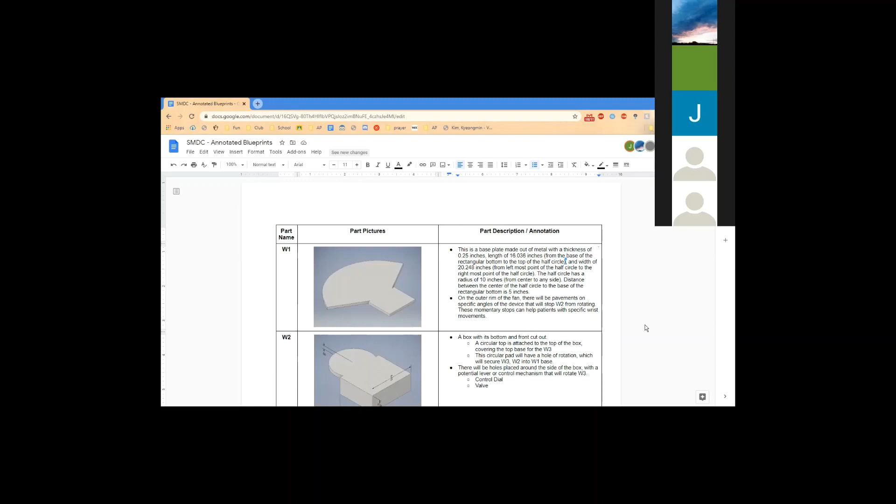Did you have any questions? Okay, I have a question. It says on the second bullet point there will be a pavement on specific angles of the device that will stop wrist 2. Do you mean like wrist 3 or something? Yeah, that should probably be wrist 2 is the cover, isn't it?

Yeah, and let's actually change the specific angles to pavements in 30 degree increments. Yeah, let's go 30 degrees increments of the device that will stop wrist 3 from rotating. Good. These momentary stops can help patients with specific wrist movements.

Is there anything else we might want to add that might describe how this piece functions, how it moves, or how it works? Any mechanical descriptions? Okay, write about like... yeah, write it down. If you guys are on the document, please feel free to make changes as we go. It's just kind of like a rough brainstorming to dwindle down on our annotated blueprints.

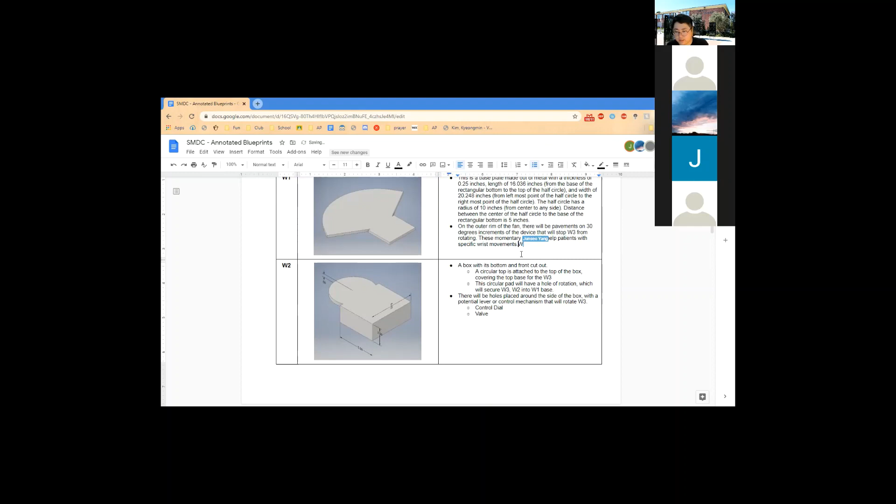Okay, while you're writing that, let me, oops, sorry. Alright, let me just write down something here. There we go. So, Junso, while you work on that bullet point, let's go over something else real quickly too.

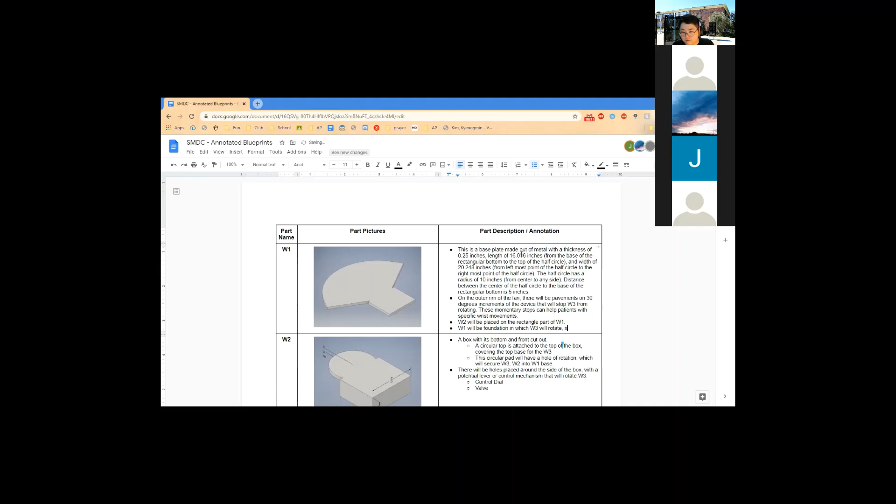First one will be the center, or the base plate - actually we already wrote base plate, so let's think of something else. Wrist 1 will be the foundation in which wrist 3 will rotate, covering the entire movement of wrist 3 as well as serve as the bottom plate for any gearboxes and internal work. Alright, you have one shot.

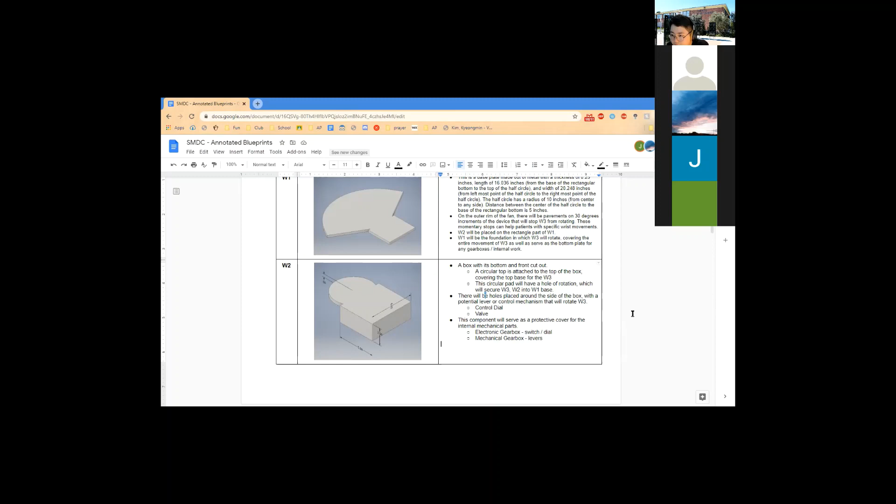Now, is this it for wrist 2, or do we want to add more? Everyone all good? I think this is it.

Alrighty, wrist 3. Ooh, this one's good. There's a lot here, who wrote this one? I guess someone who wrote it is not in the meeting. Okay, it's Magic Jane. Oh, Magic.

So this piece has both a cylindrical and prism shape to it. The cylindrical part has a diameter of 6 inches. Good, that's what I specified. Radius of 3 inches, okay good. And height of 2 inches.

Perfect. For the rectangular part, it has a width of 4 inches, right? And a length of about 7 inches. And the height of the rectangular part is 2.5 inches.

So I hope you guys know why this one's 2 inches and this one's 2.5 inches. It's because there's a little pavement on the top that separates the bottom part from the top part.

This part also has cylindrical holes placed 1.5 inches away from the very end of the width. Let's try to word that a little better. There we go. The hole has a diameter of 0.3 inches. Good, and the holes are indented 0.5 inches deep.

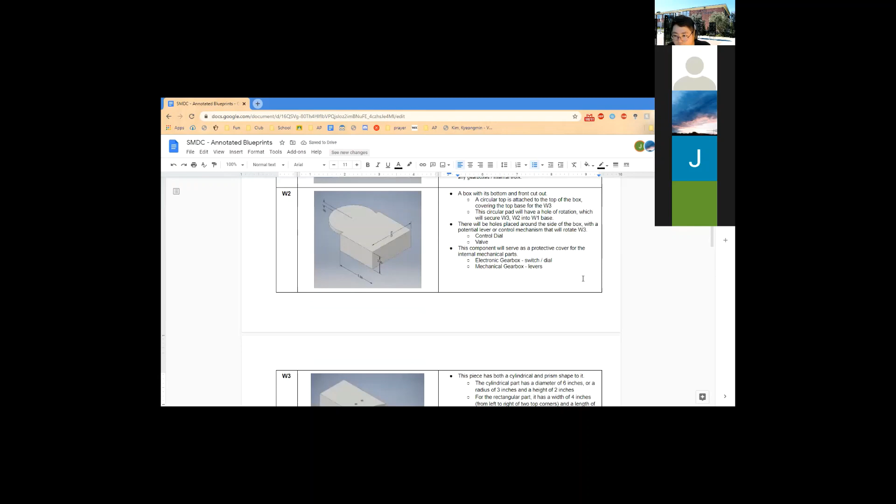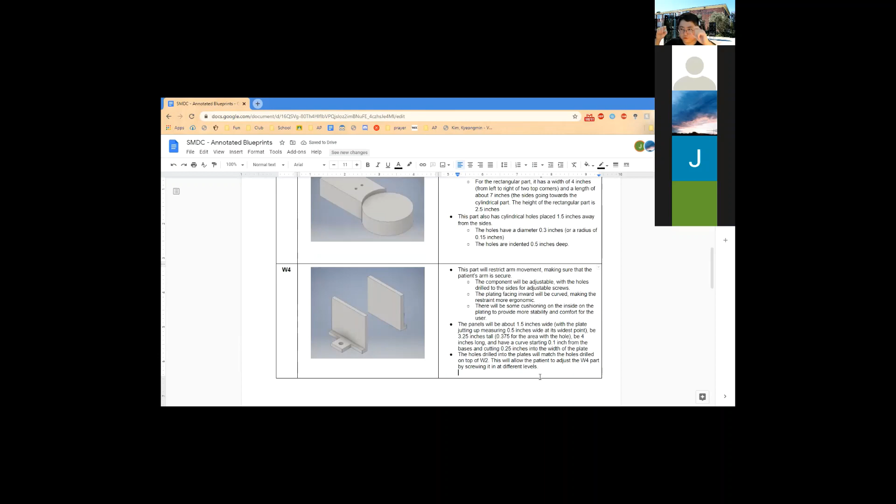This will allow the patient to adjust their arm, or adjust the wrist 4 part, by screwing it in at different levels. So do you guys know what I mean by that? Having multiple screws so I could clamp down at different levels.

So if you guys see, here, like a ruler, I have one right now. You know how there's holes inside it? Let me see if I can get it to focus. You see how there's holes in here? If we drill multiple holes at different levels, we can clamp it down at one place, or at this level. Then we can take it off, screw it back in, and clamp it at that level. But we can also clamp it down at really short levels. Everyone understand that concept of what we're doing?

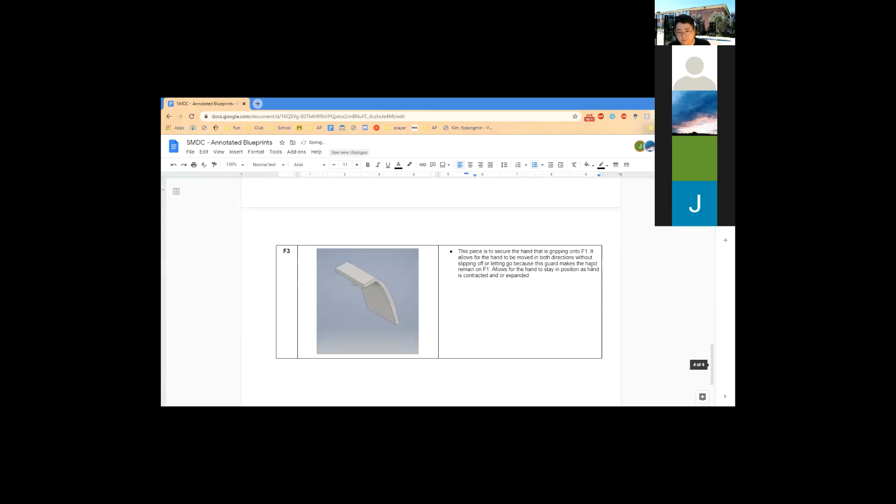And in a point after that, let's get into a little more detail, because when we just say it's a wrist protection guard, they might be like, what's a wrist protection guard? So let's quickly write that patients gripping onto F1 may slip without F3. The patient's hand will fall through the crevice between F3 and wrist 3, meaning that if we don't have this as a balanced ground, it's going to fall through the crack.

I can't exactly show you a model, actually let me try to do that real quick. While Jinso and Jake are working on those, let me pull up the assembly so I can show it to you guys a little more clearly, so that people watching this recording can easily know what's going on.

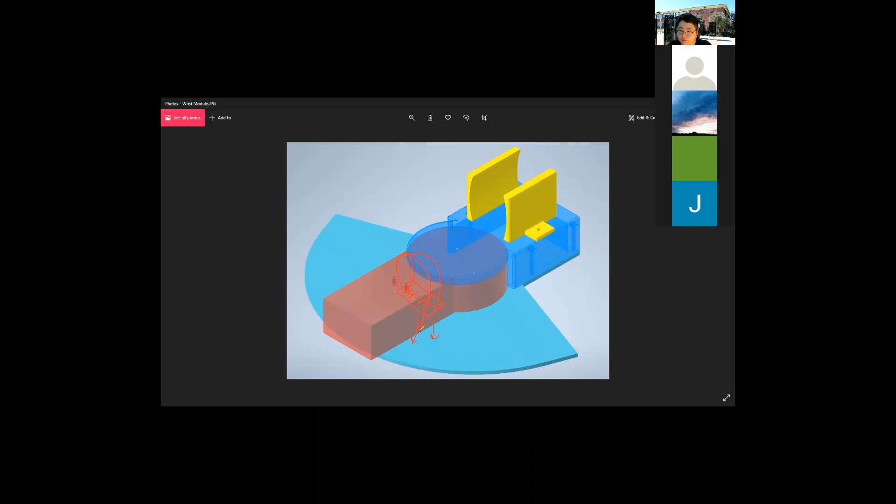That's basically what we're trying to prevent, because if we have something over here that catches the hand from falling, the hand doesn't have to fall this way. We could have something over here, and then a guard that goes down like that. So that's the gist of it. If this part wasn't here, the fingers or the hand might fall down that way, and that's what we're trying to prevent. That's what I mean by wrist guard or hand guard protection, so that there's something grabbing onto the hand that prevents it from just falling off. I hope that clarification helped you guys with the understanding.

Yeah, so perfect, let's add in just one more thing. I'm just talking about the outer ridge. The outer ridge of F2 will ensure that it keeps a uniform shape with F3, meaning there is no space remaining or blunt obtrusions. What I'm trying to say is we don't want excess material poking out.

So let me just quickly annotate over here on the surface. If this is how our F2 looks in the picture, that means our guard, which is F3, is going to have a base that looks like this, kind of an oval shape, so it can fit nicely right here. If the guard shape was rectangular, you'd also want F2 to be rectangular so it matches. That's what I'm just trying to say.

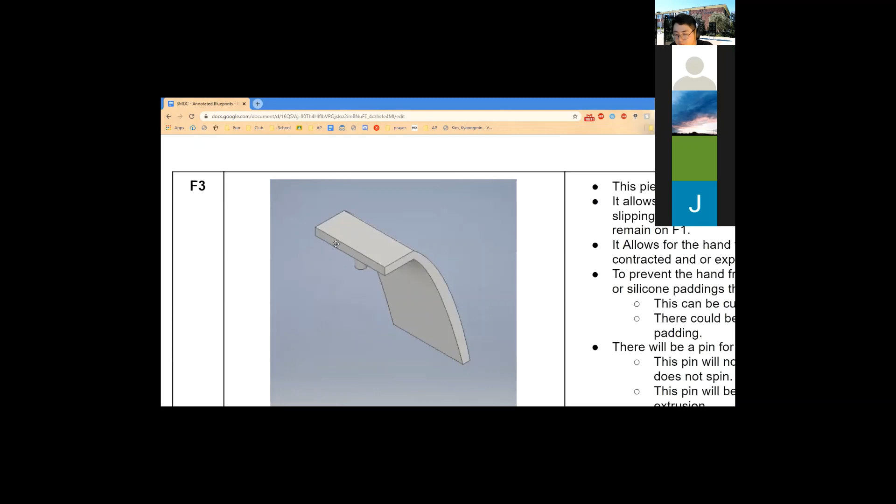Because here's the thing, a lot of what we're writing probably isn't enough to help our mentors help us with the actual manufacturing process. It's not enough, because it's never enough. It's like when you make things without a specific blueprint, information can never be enough. But the whole process of doing this is so that if we write something down, our mentors are not going to miss it. For example, this little pin over here, our mentors might overlook it, or the people who help us build it might overlook it, or we might overlook it too.

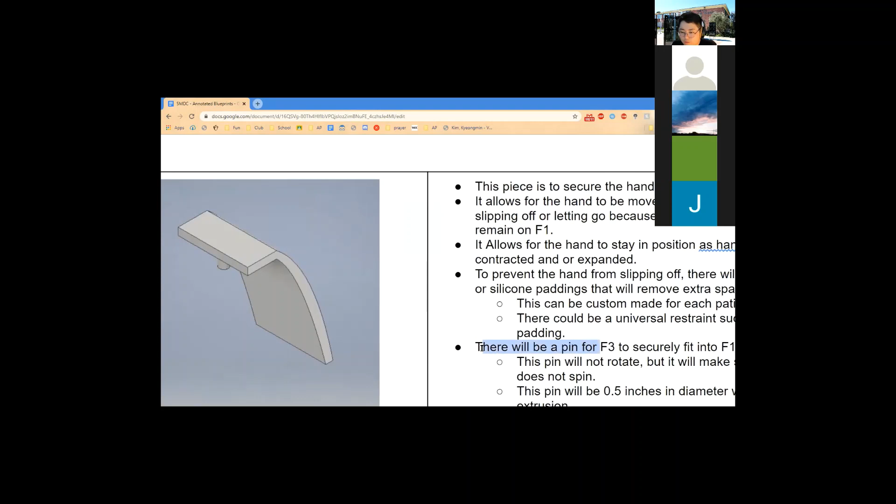But because we wrote down that there is a pin, our mentors, while we're building this, might be like, hey Jake, what's this pin supposed to be? Where is it? What is it supposed to do? Then Jake can quickly let them know, hey, this is a pin that's supposed to secure into F1. I see, yeah. So I understand if you guys think, oh wait, I don't think these descriptions are mechanical enough to actually help someone build this, because at the end of it, it's not really meant to do that. It's kind of meant to serve as guidance more than precise directions. So I hope you guys can see that a little bit.

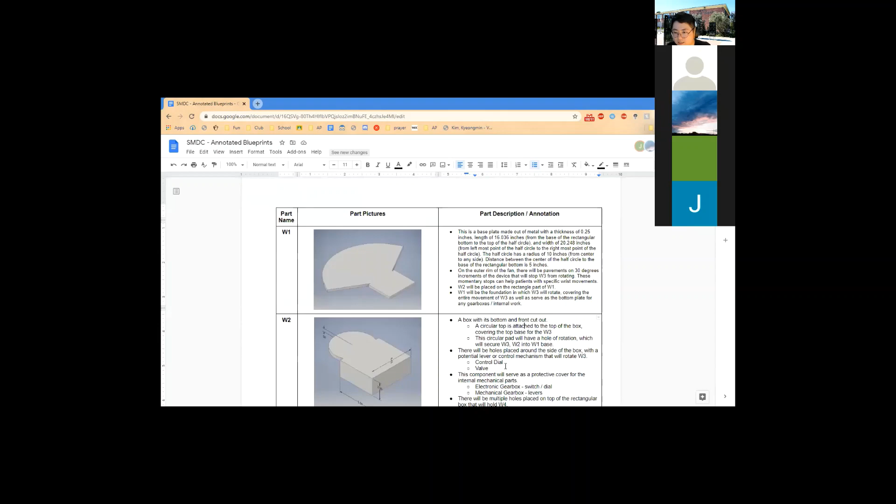Before I turn this into our mentor, I'm going to give you guys maybe one more day to edit things in.

But if you guys don't know, one of our mentors is a small robotics company called Leaders Rehab Robot, and they're mostly going to be overseeing the construction phase. Now, I know a lot of you guys, and I'm just going to say it straight up, I know a lot of you guys looking at mentors was very hard, and that was very hard for me to do also.

Finding actual mentors in this time of chaos was a very hard thing to do, and I really didn't want to take that extra step and ask them to come to our Zoom meeting. Because at the end of the day, they're doctors, active duty doctors, so it's hard to ask them to come in.

But if we have this blueprint nicely done and finished by maybe this week, I could probably ask our construction mentor, who's going to help us oversee the actual building of this, to maybe drop by our next meeting. I know this is kind of a big announcement for a small group, but I'm going to make that announcement in the Discord anyways, like, hey, I know we haven't seen our mentors much, but this could be an opportunity.

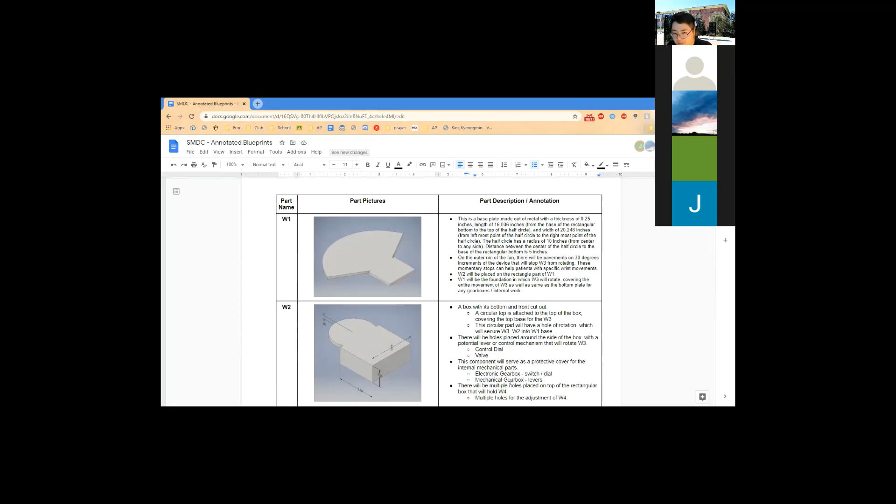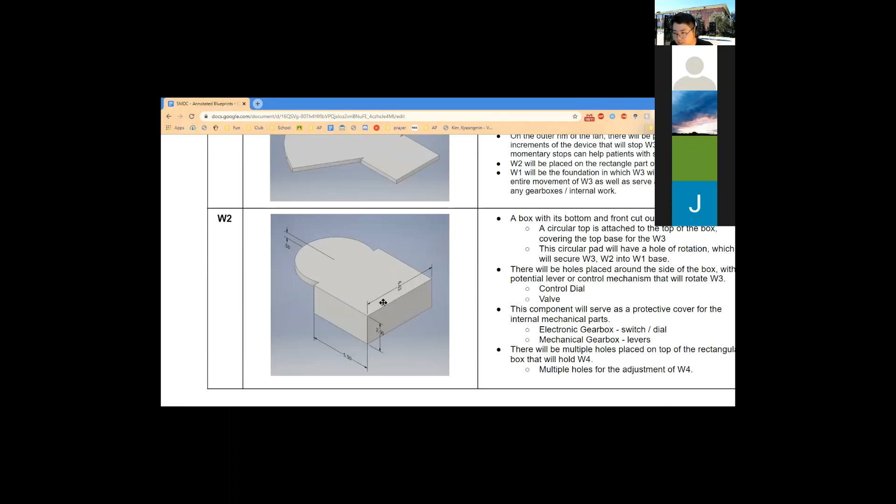I'm going to update the photos and add in specific measurements. This is kind of what we're looking at, but I'm actually going to change this part into a part you guys made so this very basic part isn't used, so I can show our mentors a more professionally done piece that you guys made. I just made these as a kind of insert, not really meant to submit to anyone, just placeholders. So don't worry, I'm going to update these pictures with measurements in them.

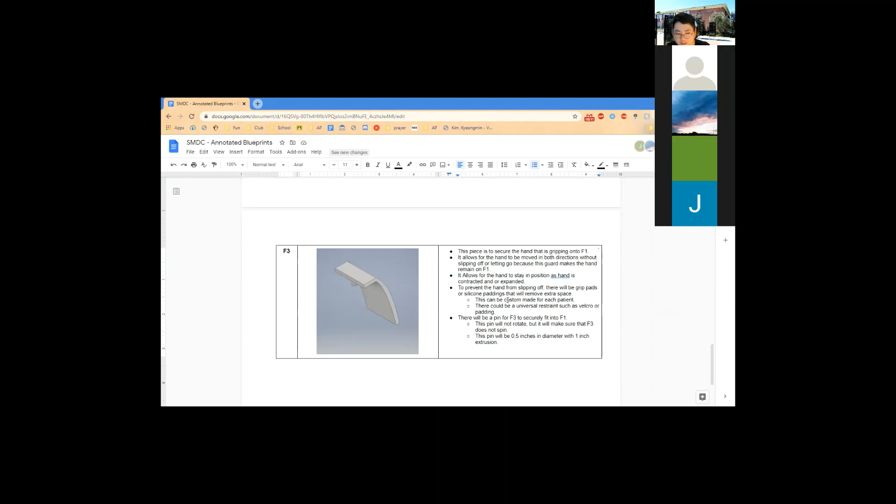What you guys want to do is refine this. I'm going to keep working on it even after the meeting, but if you want to add something to show our mentor, hey, we're really passionate about our project and we know our part — because what we want to show is not exactly that we're good students or productive workers, that's kind of arbitrary to tell. What we want to show them is, hey, we know our parts, like I made this part, I 3D modeled it, and I know everything about it.

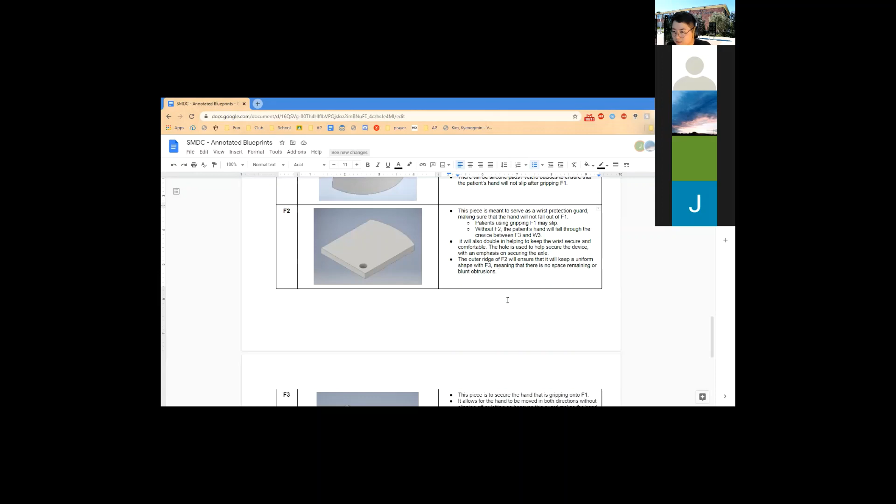That's what you want to show, and that's what I want you guys to show as well. One or two sentences are fine, that's just the bare minimum. Now that there's a possibility we might have to present this to a mentor or an organization, or just as a model of what we've been doing, let's make it a little more presentable and show that professionalism.

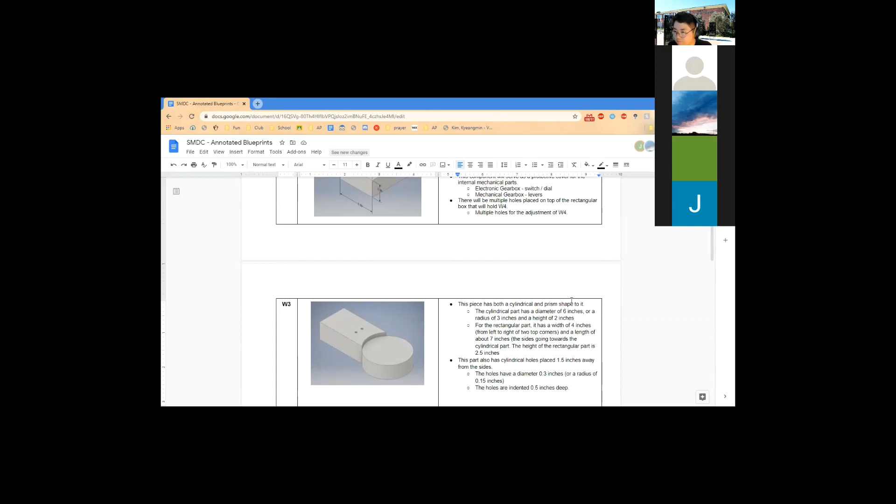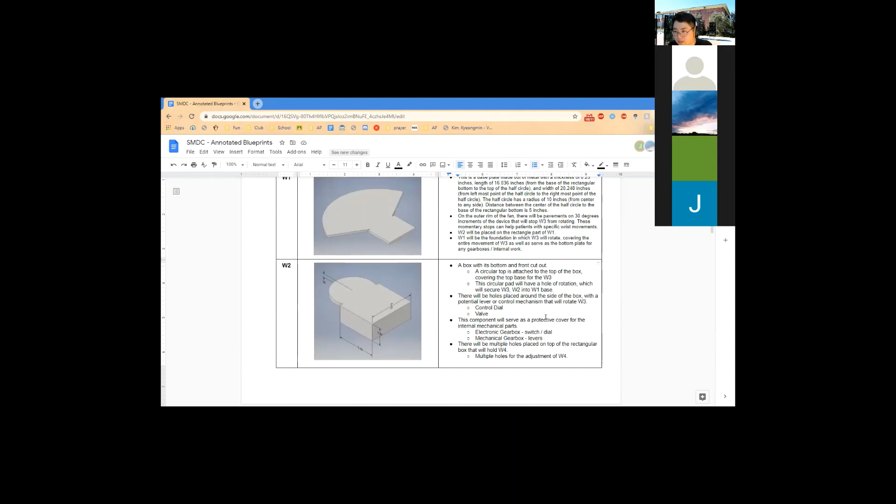At the end of the day, you guys 3D modeled your parts. You saw my tutorial video on the most basic canvas, but you guys actually modeled it yourselves. So let's show that 'we know our stuff' attitude by putting in some descriptions, specifications, and measurements, little things like that.

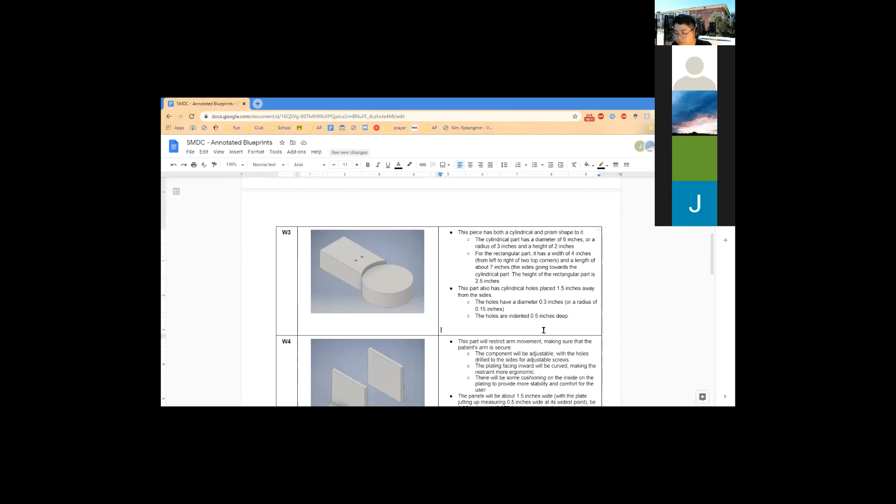So that's pretty much it for our meeting today. I just wanted to go over this blueprint so you guys know how important it is, and go over it so everyone knows what each part is doing. Before I give the final announcements, is everyone good with the annotated blueprint? Is everyone good with what they need to do?

Okay, any last questions? No, I think we're good. I was gonna say, yeah.

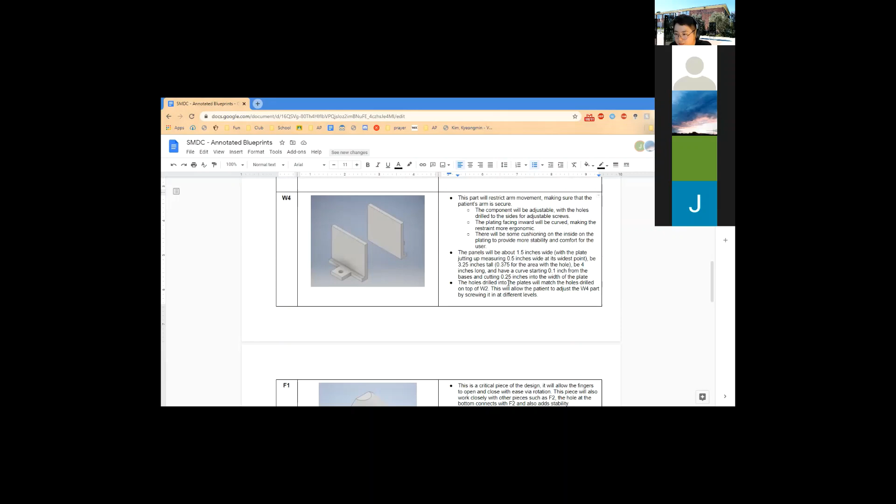So just as a TLDR for this meeting: make this blueprint really nice looking and a little bit more descriptive. Add in a lot of sentences into it.